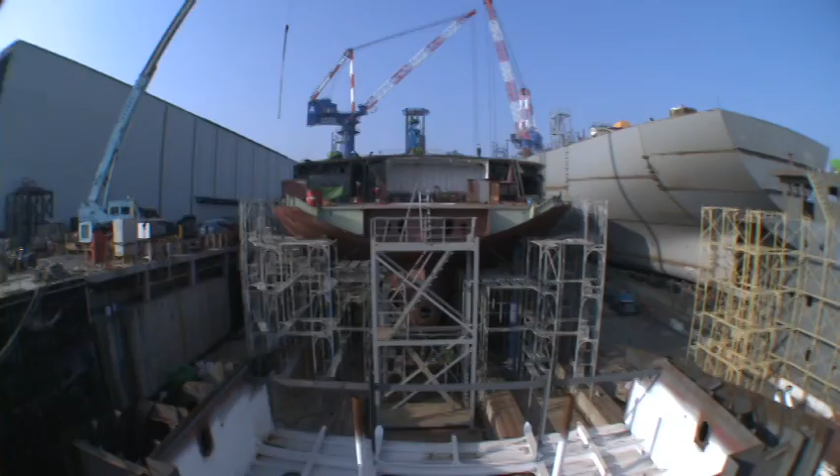Today, Taiwan is a sophisticated world leader in cutting-edge engineering and technology. Jong-Shyn Shipbuilding has played a central and profound role in taking it there. Jong-Shyn Shipbuilding is Taiwan's biggest privately owned shipyard and employs over 1,000 employees with an annual revenue of approximately $100 million.

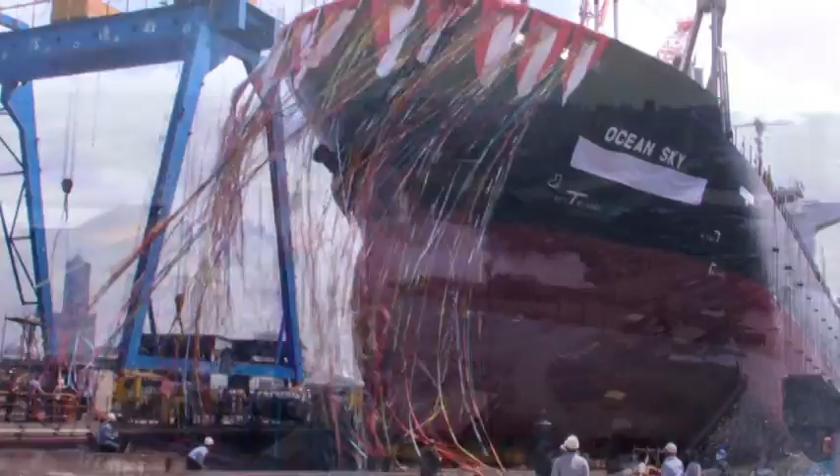Its massive size spans 6 giant shipyards, each with its own area of specialization, but with a collective expertise that makes each ship produced a paragon of craftsmanship, engineering, and innovation.

The Jong-Shyn Shipbuilding Group was founded in 1985 and is located in Kaohsiung City, Taiwan. Since 1985, Jong-Shyn Shipbuilding has produced over 300 ships, ranging from state-of-the-art military craft used by the Coast Guard to international bulk carriers, tugboats, ferries, official boats, and technologically advanced fishing vessels. The glamorous side of Jong-Shyn shipyards creates high-end luxury yachts displaying stunning hand craftsmanship and world-class design.

In addition to shipbuilding, more than 600 ships are maintained and refitted by Jong-Shyn for the Navy, Coast Guard Administration, and private companies.

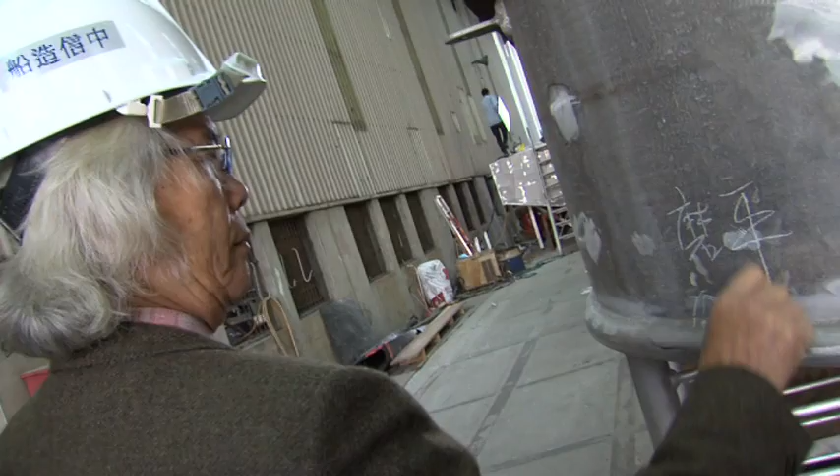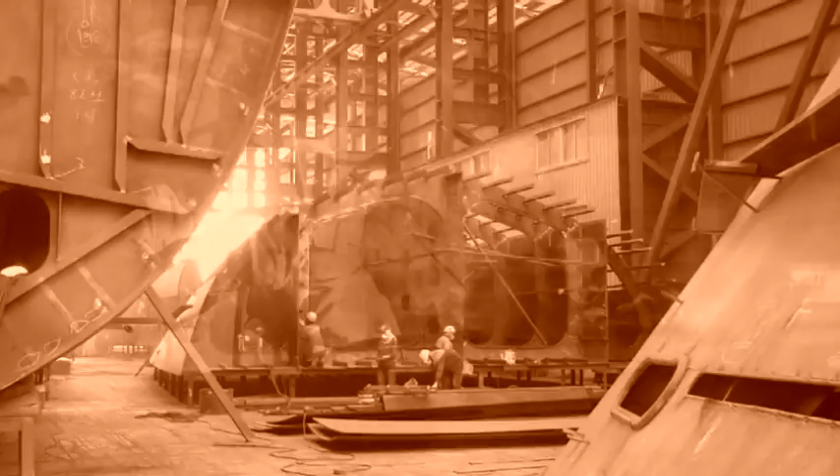How did such a premier shipyard come into being? The answer lies with our founder and owner, Chairman Han Bi-xiang. His family was very poor. In high school, he sold fish on his bicycle, where he got to know workers at the port. They helped get him a job in a ship factory, where he earned less than $1 a day hammering steel shells. He then worked his way up, learning all the basic skills of welding, gas cutting, and blueprint modeling.

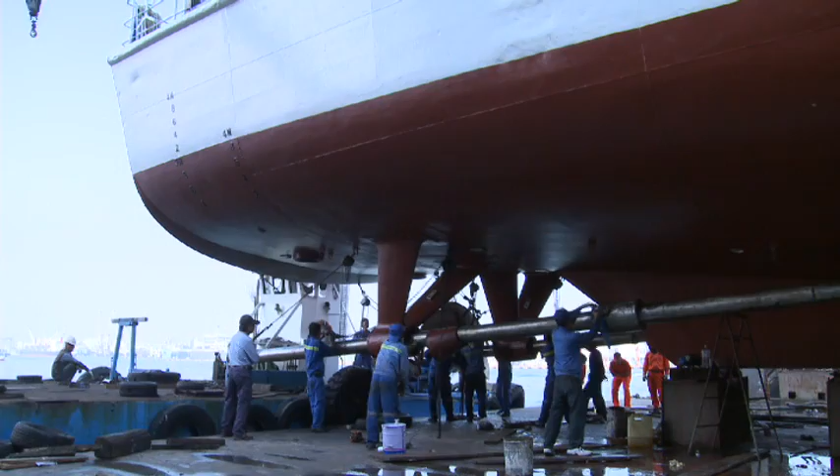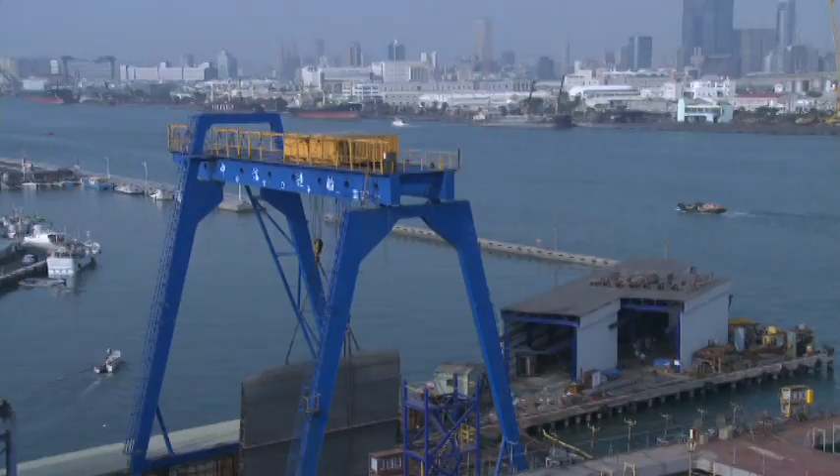In 1969, Chairman Han launched his first company doing ship maintenance. After years of saving, Chairman Han founded his first shipbuilding company in 1985. By the early 90s, his Jong-Shyn Group owned 5 factories, and it became one of the biggest shipyards in Taiwan, leading the industry there.

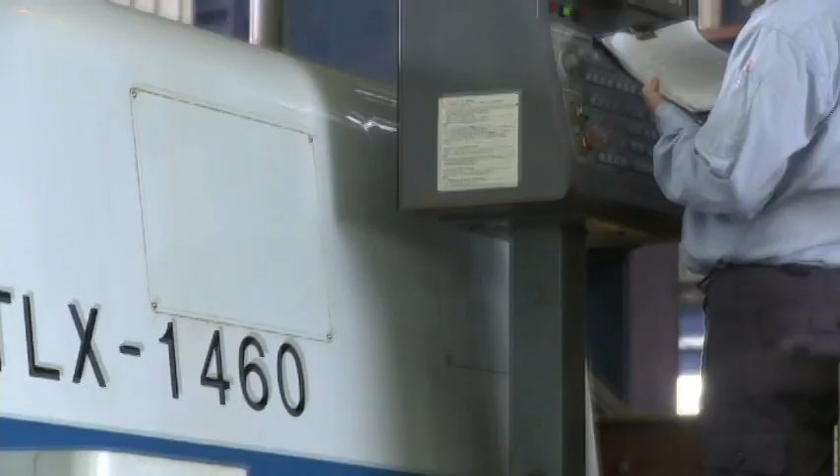He invested several $1 million in CNC cutting machines and shipbuilding software. He hired experts from leading universities to develop new shipbuilding techniques. Then, in 2002, Chairman Han realized that expanding into yacht making was both an artistic challenge and a sound investment in his company. The following year, he spent $22 million to acquire 2 more shipping companies, and Jade Yachts was born.

Chairman Han never forgets his roots. Today, he still comes to work every day at 7 a.m.

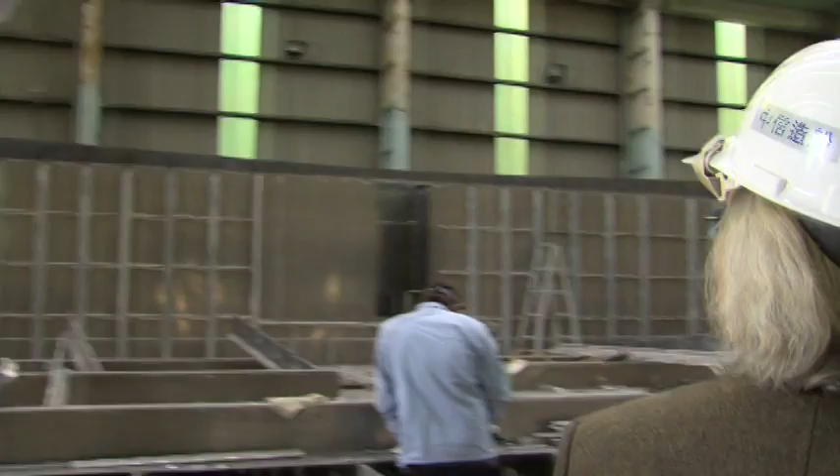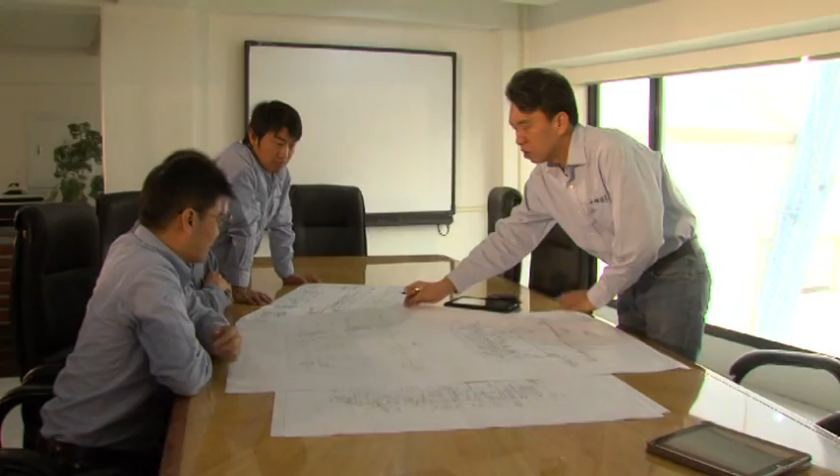He is also president of the Taiwan Shipbuilding Union. Family remains the most important to him. His sons Eric Han and Memphis Han are vice presidents of the company, and both help run the business. For someday, they will be in charge.

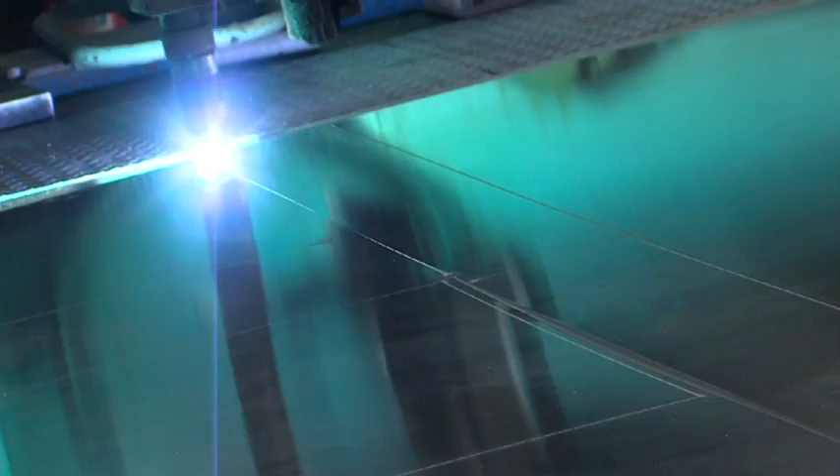Jong-Shyn is the parent shipyard to a diverse family of marine engineering and manufacturing yards that create many types of vessels, from commercial boats to military craft to luxury yachts. This is what gives Jong-Shyn the advantage. The diversification of our yards adds experience and expertise to all of them.

The cutting-edge marine technology used in fishing and military boats can also be applied to super yachts, while conversely, the fine craftsmanship that details the yachts also contributes to a streamlined design for more functional ships.

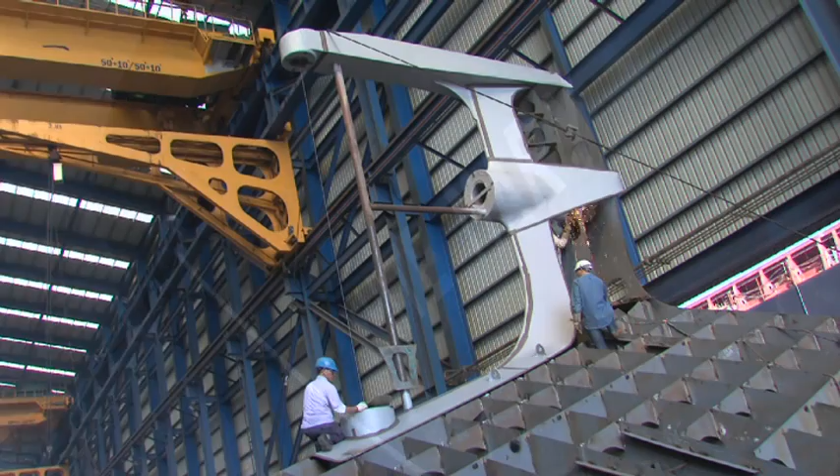Our ships are not mass-produced. They are all custom-built. The variety of Jong-Shyn shipyards provides the widest capability, allowing custom shipbuilding for every kind of vessel, whether commercial, military, or luxury yachts. This gives each individual owner the opportunity to control his ship from design to production.

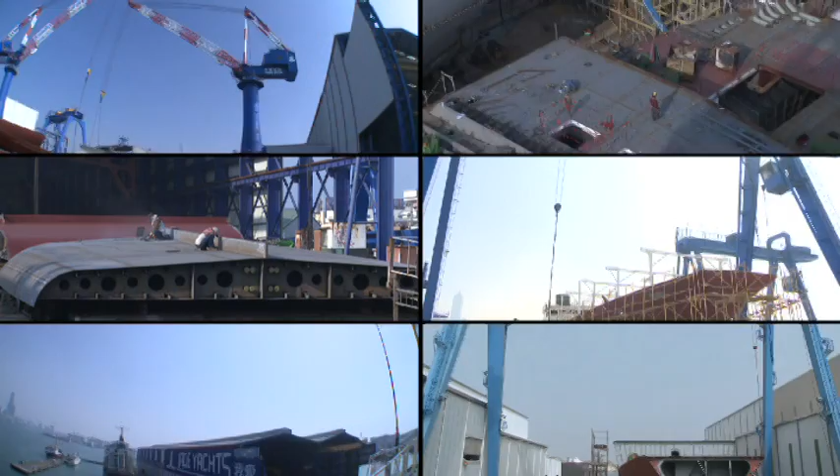Our Jong-Shyn Group has a total factory space of 130,180 square meters. Our shipyards are divided into half a dozen different functional yards that supply different parts to the process of shipbuilding, from steel cutting to the fine artisan work of teak wood detailing. Each stage of shipbuilding is carefully controlled to maintain the highest quality, level of safety, and design.

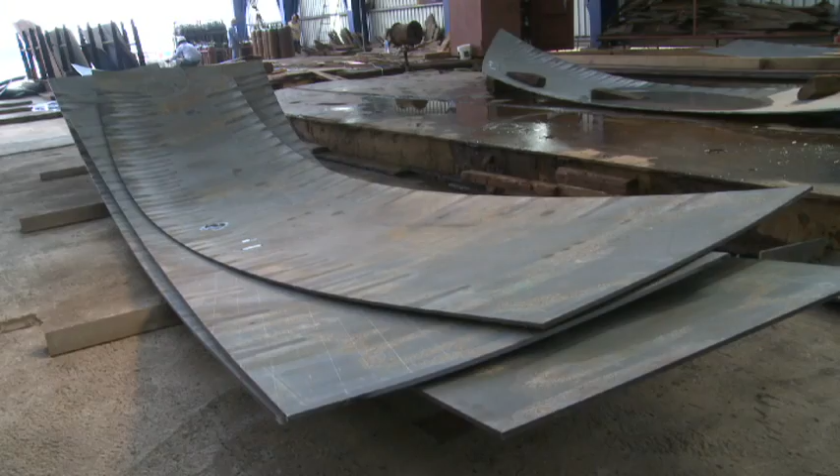Jong-Shyn Shipbuilding offers the latest state-of-the-art technology. Steel is cut with laser accuracy. After the steel is cut, it is sent to the assembling factory for block assembly.

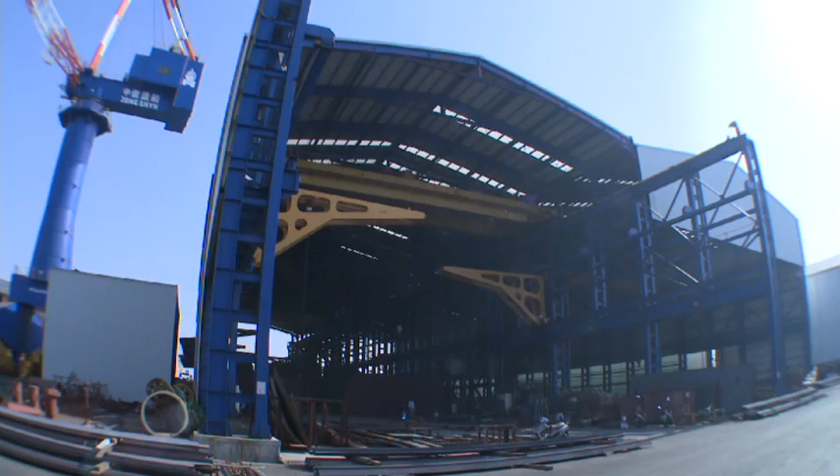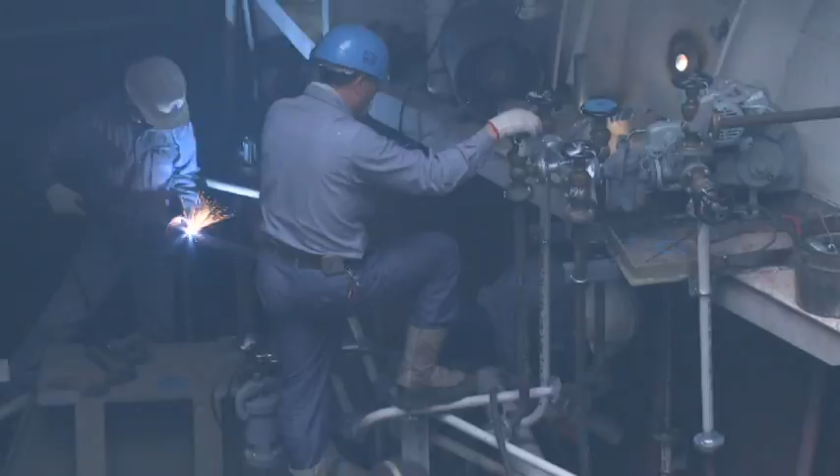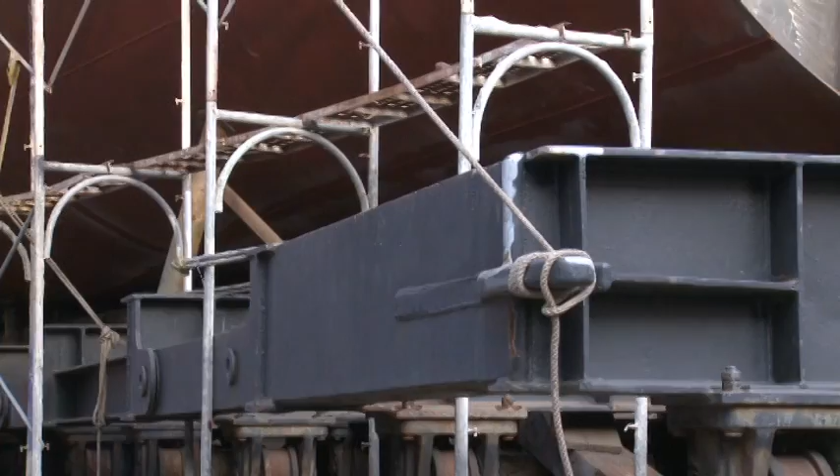This factory produces piping plans for all blocks and does welding, pressure-raised leakage test, simulated field assembling, dismantling, and pickling or galvanizing. One 5,000-ton shipway, measuring 18 meters by 100 meters, can take several blocks for inspections.

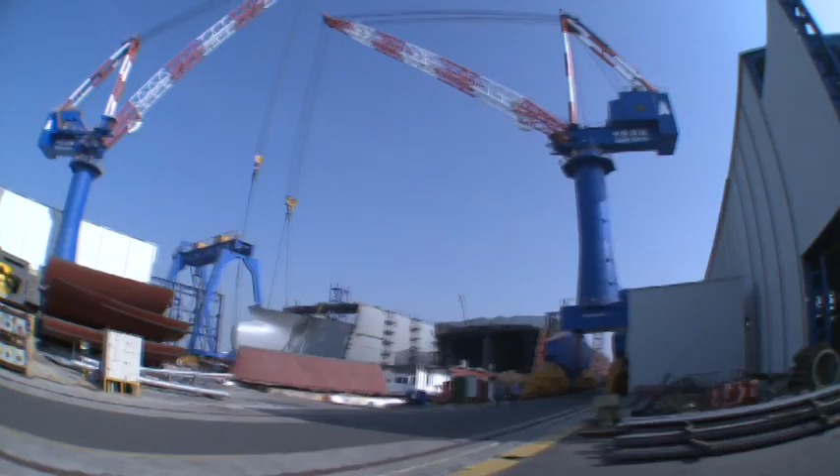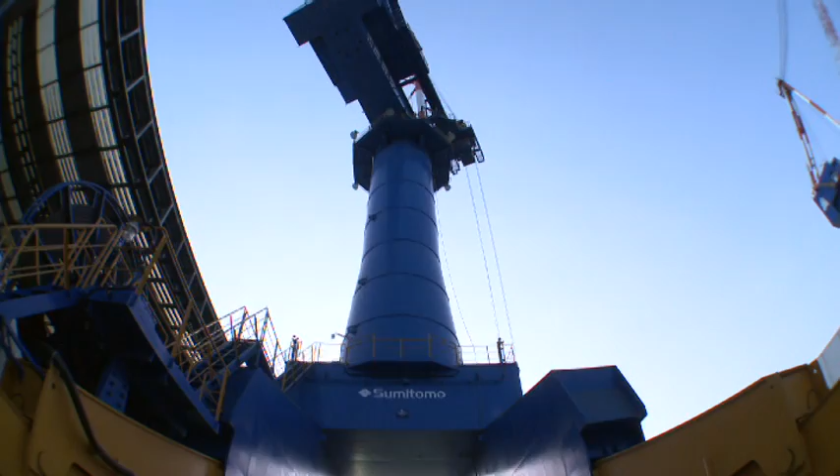The trolley shipway can assemble big blocks until completion for sea trial. Block erection for big boats is done in a yard area complete with a 40,000-ton semi-dry dock measuring 210 meters by 50 meters. In this expansive space, many ships can be assembled at the same time. There are two 100-ton moving cranes which transfer the inspected assembled block and also other large facilities to the boats.

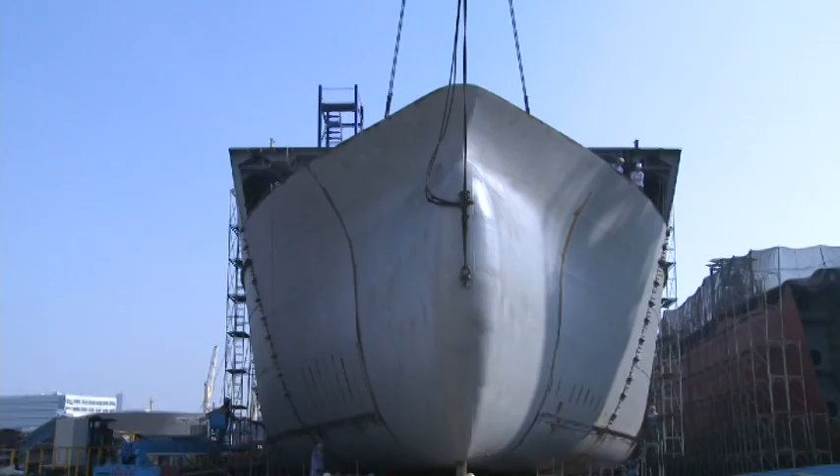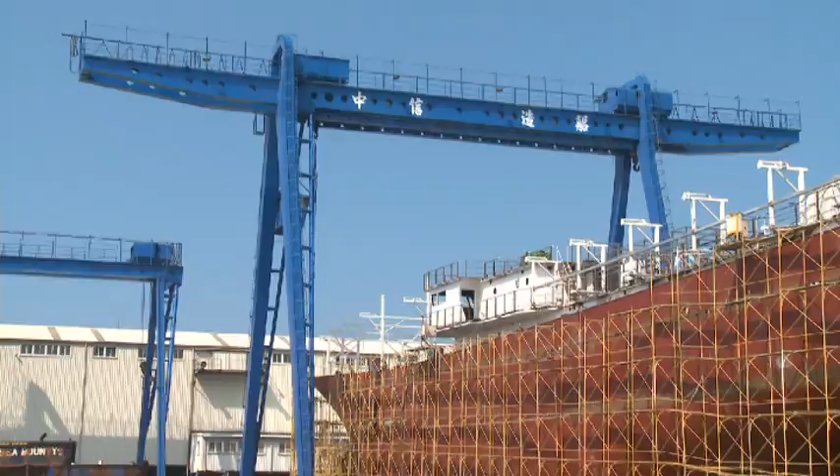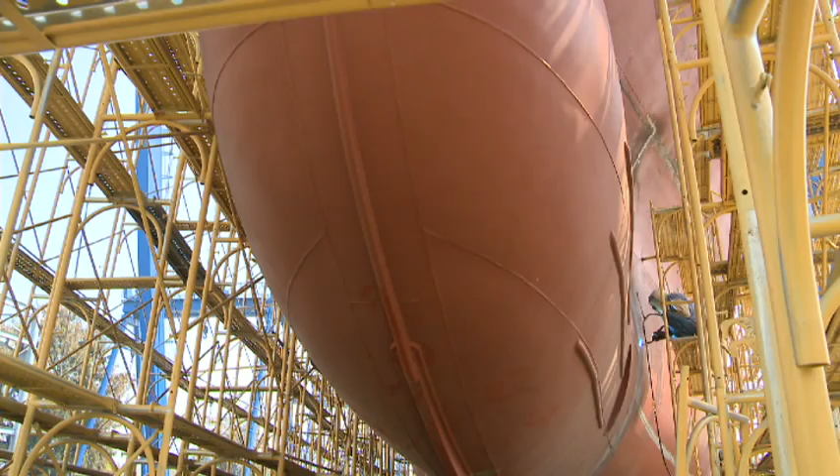Linshen Yard makes platforms for fishing boats. Jong-Shyn Yard has a 2,000-ton shipway measuring 15 meters by 70 meters and a 1,000-ton shipway measuring 15 meters by 60 meters. These shipways can take inspected assembled blocks and finish them until launch.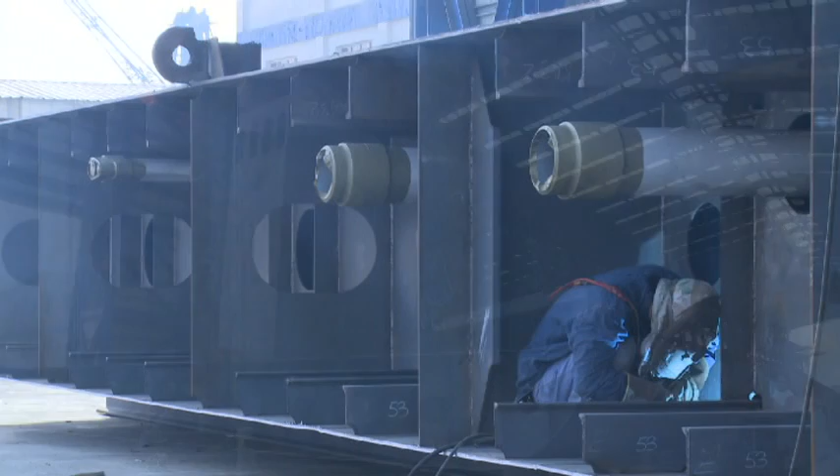Another area has a 320-meter dock and two 150-meter docks. It boasts a 100-ton moving crane for moving big facilities to the boats. Its main mission is to make blocks for new ships, as well as finishing work of sandblasting and painting.

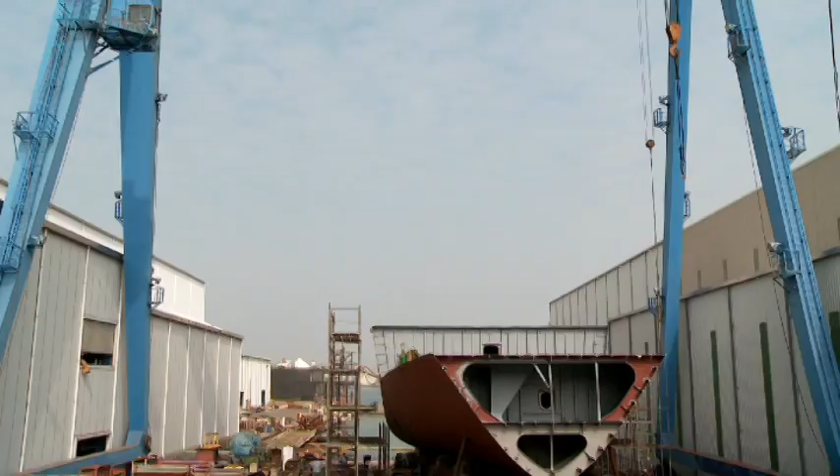The Jade Yacht building area has a 3,000-ton shipway, 16 meters by 80 meters. The trolley shipway can assemble big blocks until they are finished together and launched. This is where some of the world's most beautifully crafted yachts are born.

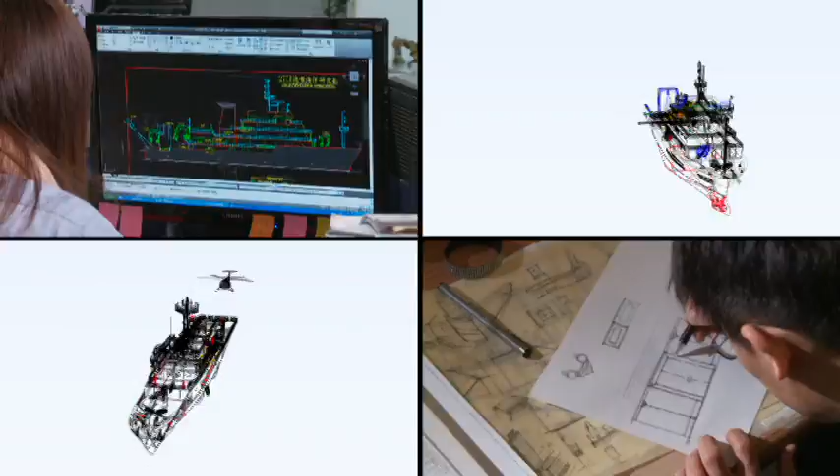Jong-Shyn's diversity is the key to our shipbuilding success and wealth of technical knowledge that keeps rapid pace with the world's technology. Jong-Shyn Shipbuilding has invested millions of dollars in new technology for fishing boats, Coast Guard patrol boats, and yachts.

Our vast experience brings every project to the cutting edge of marine engineering and design.

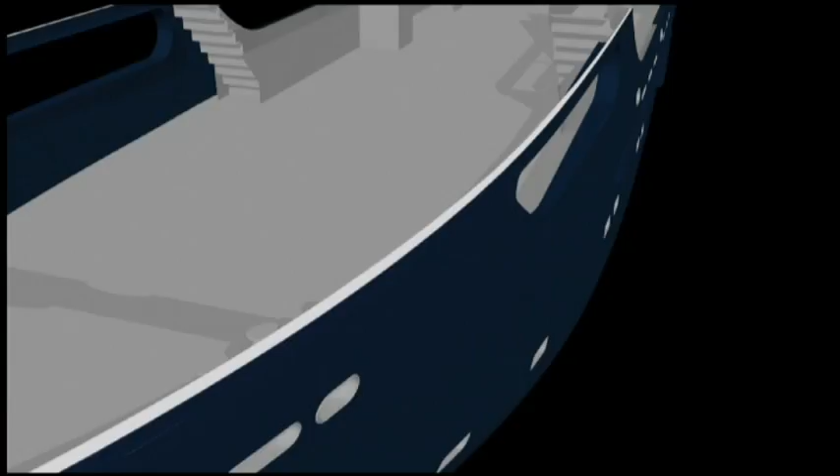One of the standout trademarks of Jong-Shyn Shipbuilding is our steel aluminum construction. It is much stronger than fiberglass, harder to damage in a collision, and more difficult to burn than fiberglass.

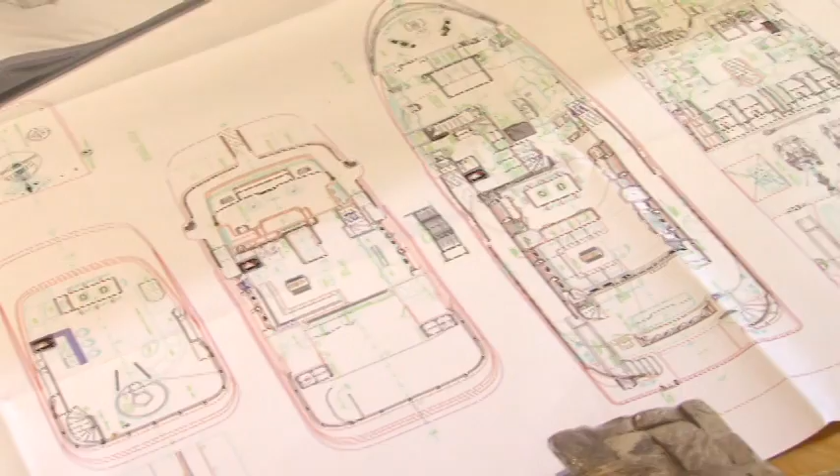Through vision and hard work, we have dramatically improved both the design and function of our yachts. Models are now able to go up to 50 knots per hour, and our hull design is elegant and beautiful.

Reliability and safety are Jade Yachts' hallmarks. But Jade Yachts VP Memphis Han also believes that we can build boats comparable or even to much better standards than in Europe or the US.

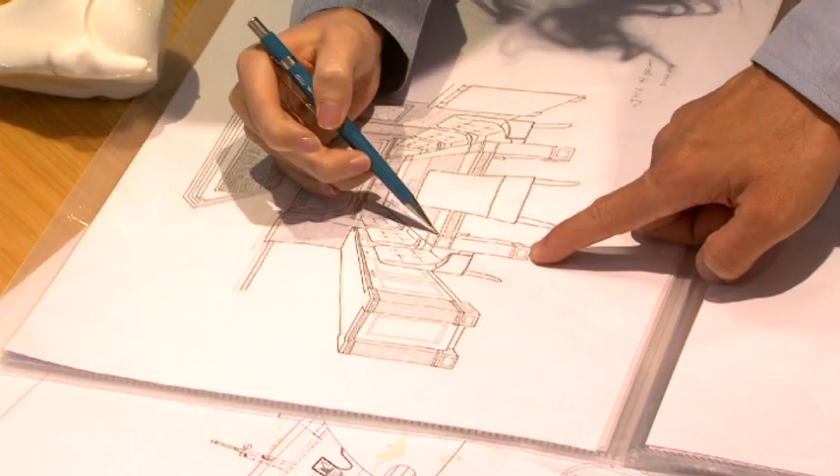We build beautiful and unique yachts, each with a personality of its own.

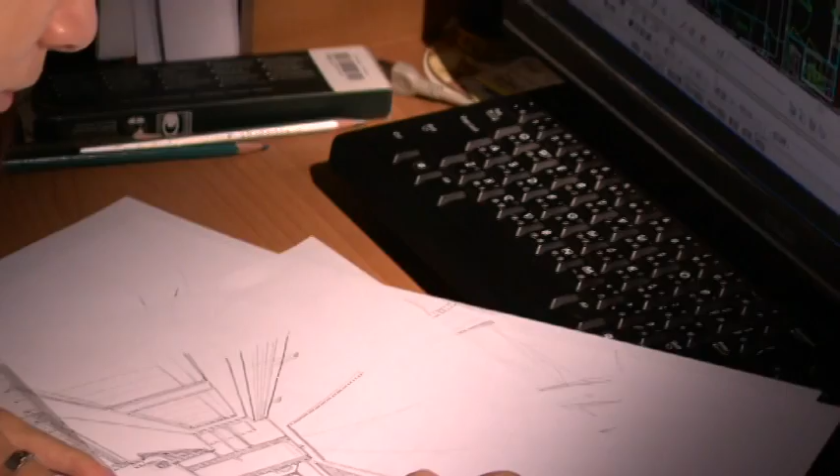We listen to the owner's description and follow his or her custom preferences. We put all of our experience, artistry, and imagination into their dream.

Stainless steel finishing is handcrafted meticulously. Teak wood is used throughout, providing the most luxurious and durable decks available.

Rich interiors are painstakingly constructed over hundreds of hours by master craftsmen. The reflective surfaces inside are treated with 10 to 12 layers of special protective coating, and rare natural marble is

installed by stonework experts. What sets Jade Yachts apart is the exclusive knowledge and hand craftsmanship that goes into each project. Highly sophisticated mirror panel coating requires years of experience to execute perfectly.

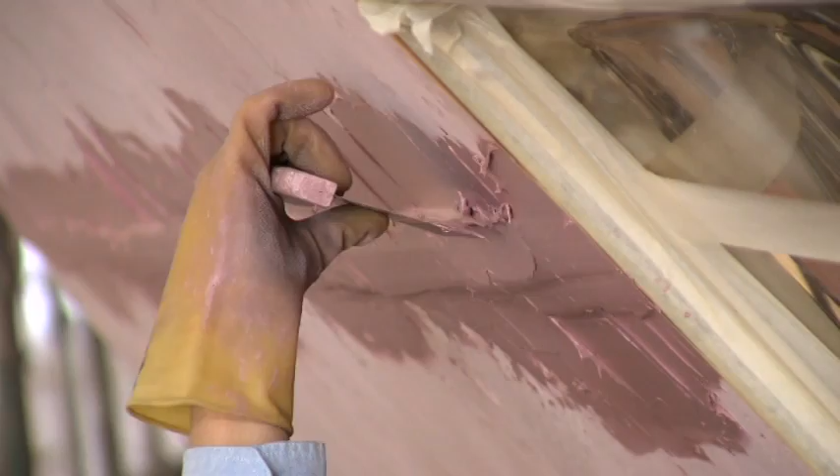The application of putty and sanding are extremely difficult, but with techniques learned from Europe's top masters, our craftsmen have perfected it.

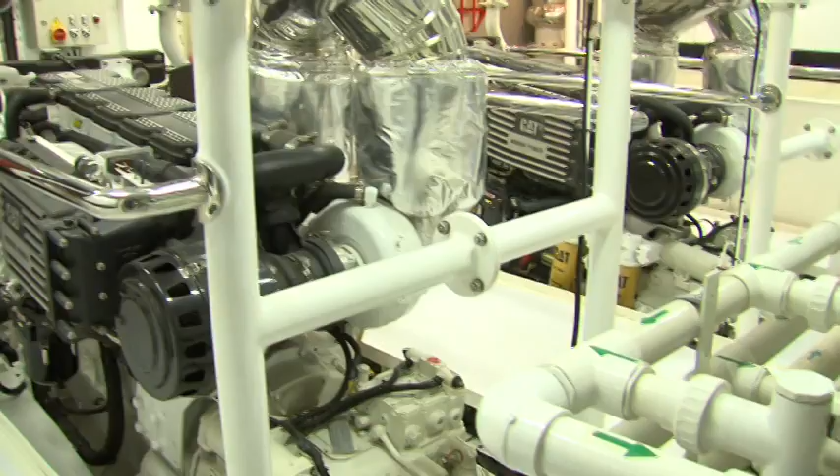We also employ noise suppression methods that satisfy the requirements of the most stringent yacht markets in Europe.

From the most glamorous ship to the most hard-working, all of Jong-Shyn Shipbuilding's vessels engage the most advanced and contemporary technology.

Technology has truly advanced Jong-Shyn's engineering in harbor tugboats for the 21st century.

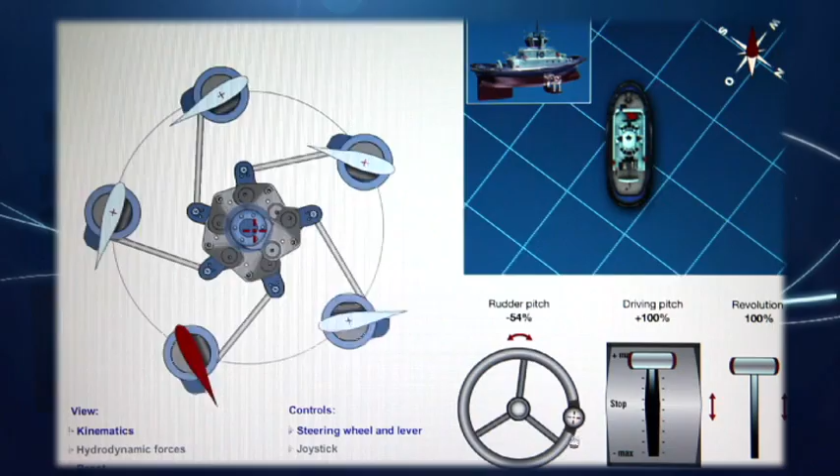We now utilize a special Voith-Schneider propeller, which is different from the usual propeller spiral design. The boat can also turn in circles on the same spot in shallow water.

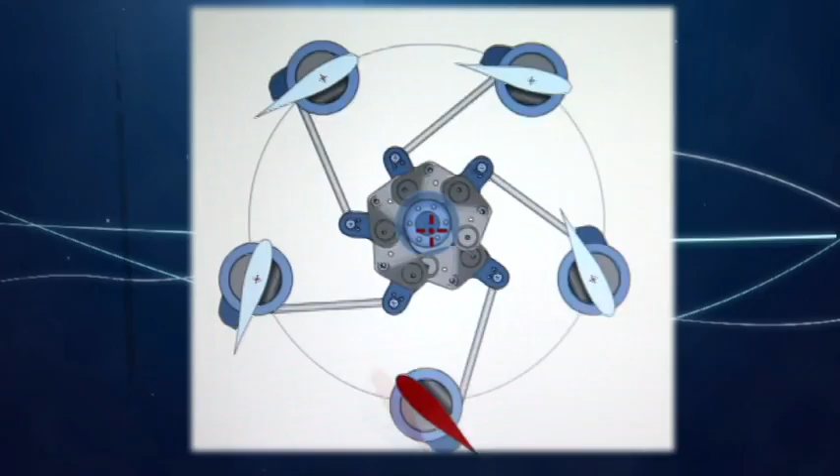After building many tugboats, we have accumulated a great deal of experience and technique that puts our tugboats a notch above with superior speed, strength, and accuracy.

Jong-Shyn's state-of-the-art Navy ships are commissioned by Taiwan's Coast Guard Administration. At 2,000 tons, they are the biggest in the Coast Guard fleet. It uses a dual propulsion system that contributes to the speed of a very large ship.

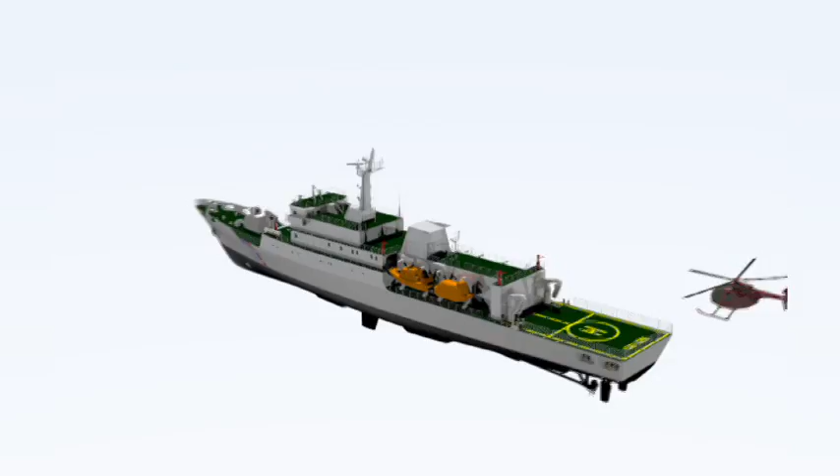This is the first Coast Guard vessel with a helicopter deck. The Advanced Helicopter Landing Guide system is the most unique design of this ship.

It also has a helicopter garage, which provides parts storage, a meeting room, and a resting room.

This type of ship is built of steel and aluminum alloy, 98.5 meters long and 13.2 meters wide, with a draft of 7.6 meters. Maximum speed and navigability are 24 knots and 7,500 sea miles.

It can accommodate a crew of 68.

In our general bulk cargo ships, the design of these ships must follow the rules of the International Convention. During the production, depending on where the ship will be registered, we custom build the ship to follow the country's ship code and adhere to their standard on materials, structures, safety, and equipment.

Our long experience building fishing boats lends Jong-Shyn's superior expertise in the field, putting us at the cutting edge in creating the new modern fishing boat.

Deep-sea fishing vessels built by Jong-Shyn are characterized by their speed, stability, cruising range, fuel efficiency, labor efficiency, and productivity.

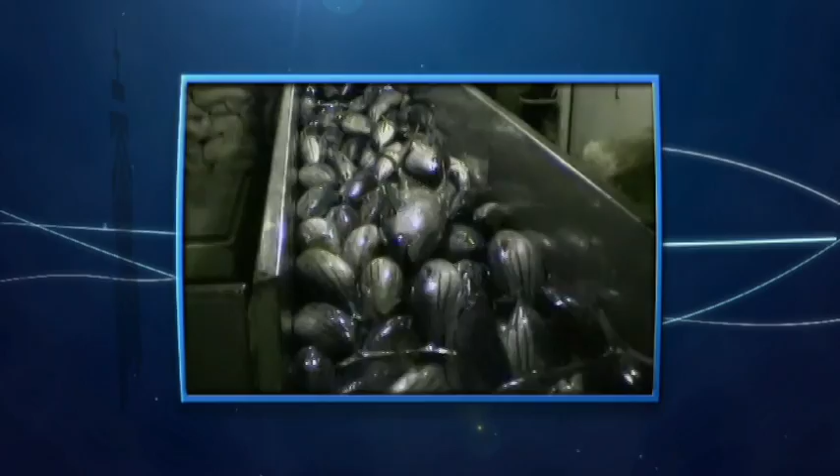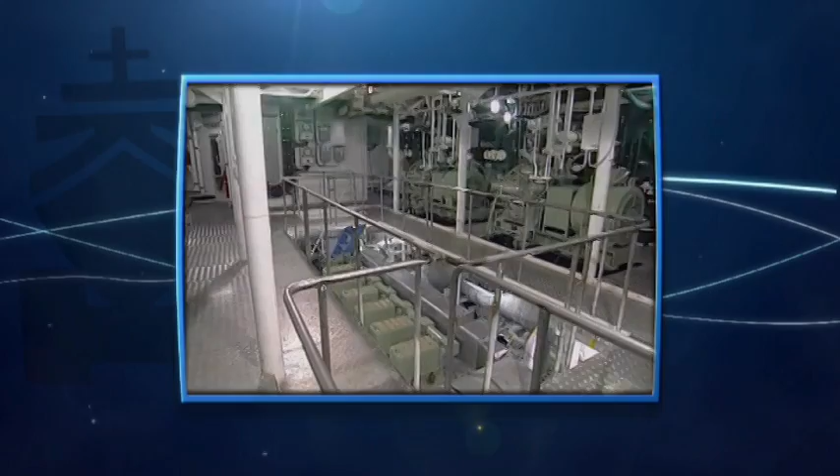Powerful engines built with precision engineering lower fuel consumption and costs significantly. The state-of-the-art radar equipment, huge chill space, and reinforced freezing capacity add to the design.

And these boats also have highly automated fishing equipment.

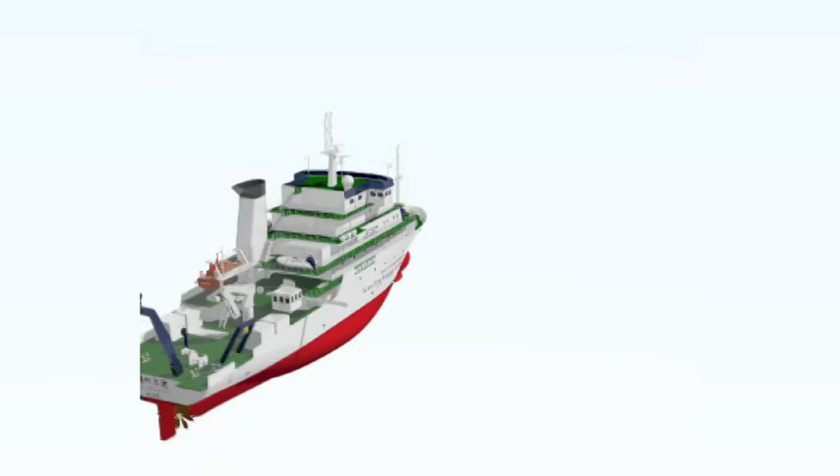No matter what ship we build, our bar is set to the highest standard. Our innovative team at Jong-Shyn remains dedicated to one simple goal: making the best boats in the world.

Half a century ago, made in Taiwan signified cheap manufactured goods from a tiny country. Today, Jong-Shyn Shipbuilding has played a major role in transforming that image and demonstrating to the world that Taiwan is a top producer of quality high-tech and luxury products.

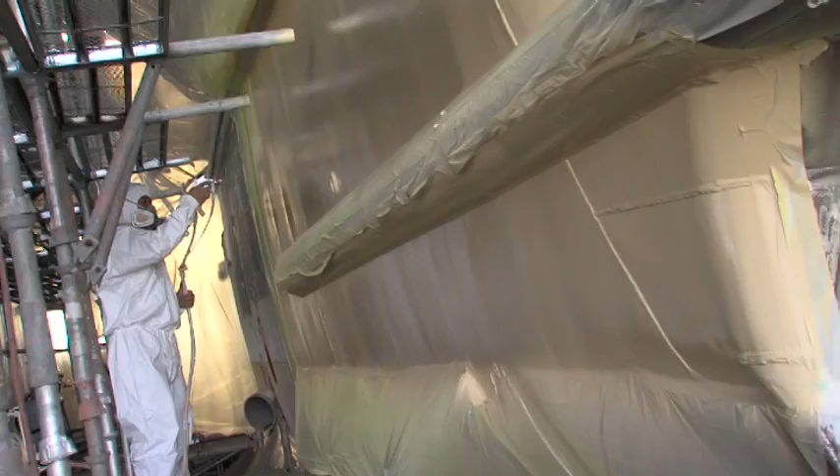We continue to look to the future, to the rapidly growing technologies of the 21st century, and to the needs, desires, and dreams of our ever more sophisticated clients.